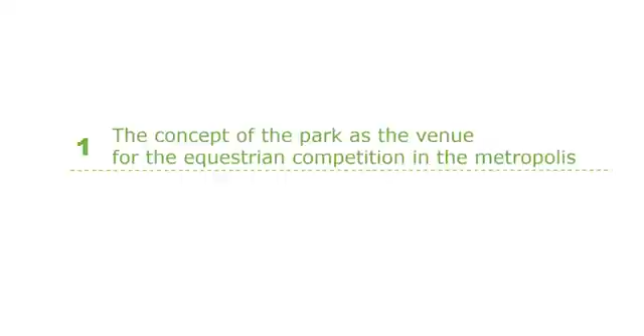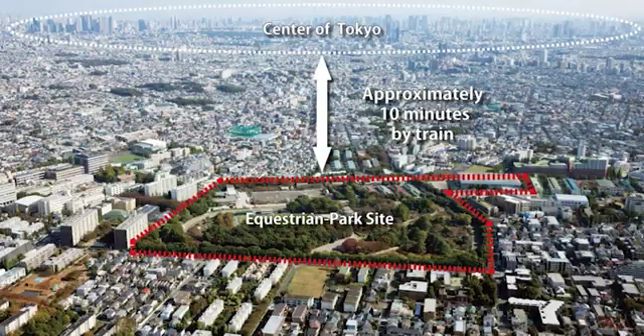JRA Equestrian Park for Tokyo 2020 is owned and managed by JRA. As you can see from the aerial shot, it's within a heavily residential area near the center of Tokyo. During the 1964 Tokyo Olympics, this site was used as an equestrian venue. At the time, this residential area was not so dense.

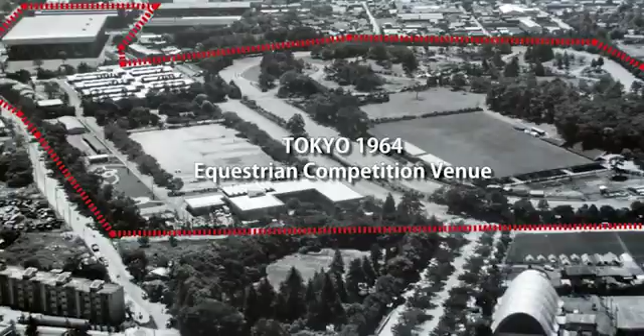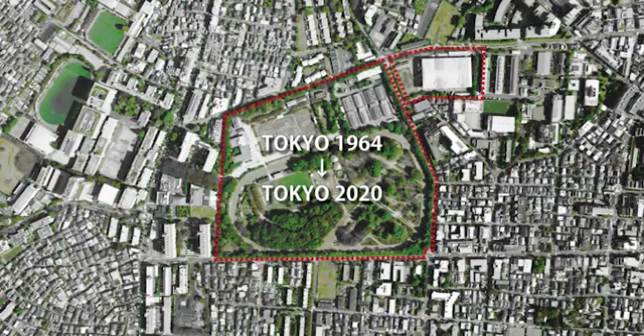This time again, JRA's Equestrian Park was chosen as one of the Olympic venues. But before the games, there were some issues to be resolved. First, all the facilities and equipment had to be renovated to meet the requirements of the FEI, International Federation for Equestrian Sports. They were too old to meet current laws and regulations for disaster prevention. As per FEI regulations, for the Olympic and Paralympic Games as a top world-class equestrian event, we found that the required total site, including stables, control center, and accommodations for grooms, needed to increase so that it would be 2.5 times bigger than the original.

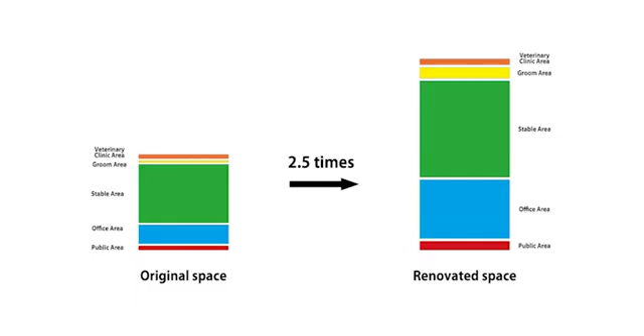15,000 people per day are expected, including spectators and volunteer staff. Also, the site is quite smaller than other equestrian venues at past Olympics. So efficient use of space is vital.

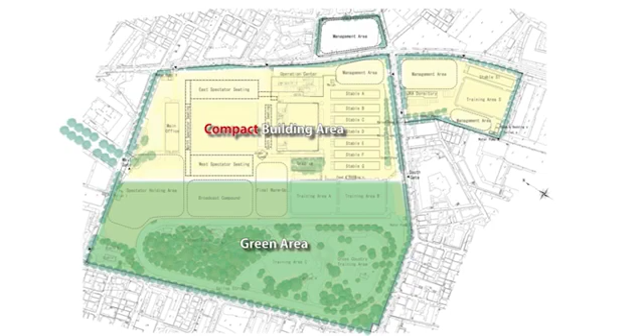Throughout these conditions, the idea of zoning was set for the entire site of this project. We have adopted a method that clearly separates the building area, which is as compact as possible to gather the buildings, from a greenery area, which has been developed while keeping the existing greenery. Here is the space for the building area, and you can see how the facilities are allocated.

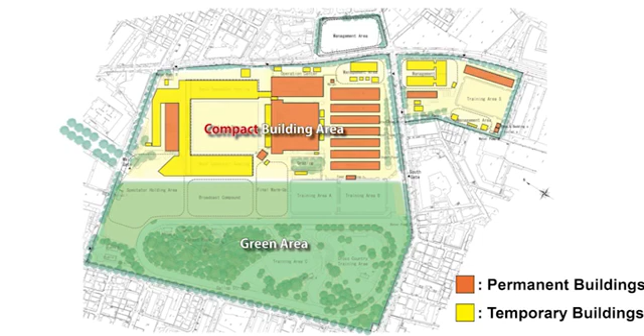In order to preserve the green environment that has existed since the 1964 Tokyo Olympics and construct the buildings compactly, we adopted the method of stacking various room functions 3-dimensionally, and the temporary stands.

Here is the main arena. As an example, the main arena had to contain seats for 10,000 people. Generally, a temporary viewing stand is built with a simple framework of single pipes like this. But in Japan, where earthquake countermeasures are strictly enforced, a viewing structure like that is not allowed.

Therefore, our viewing stands are made of steel frames. By taking advantage of this restriction, we made effective use of the lower part of the viewing stands to secure space and rooms for the spectators and the operational functions for this event.

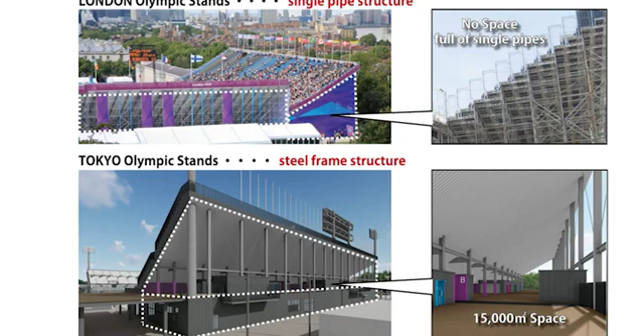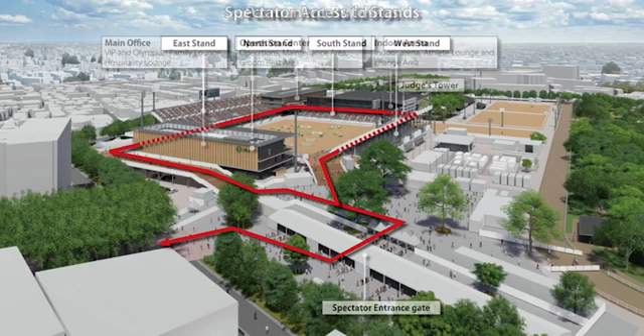Furthermore, during the event, we plan for spectators to move on the second floor, and the main arena will be surrounded by a temporary pedestrian deck. The deck connects to the temporary stand and permanent buildings, such as the main office, indoor arena, and operation center, with easy access. As a result, we succeeded in securing about 15,000 square meters with this two-layer concept.

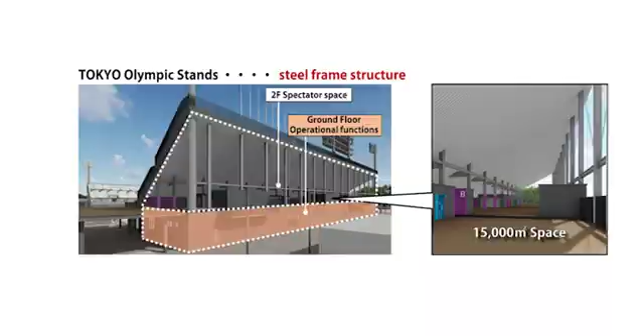From a security perspective, the venue became more manageable by dividing the zone into the first floor for operations and the second floor for spectators. The main office will have a VIP and family lounge for Olympians on the third floor, and a hospitality lounge for customers with high price tickets on the second floor.

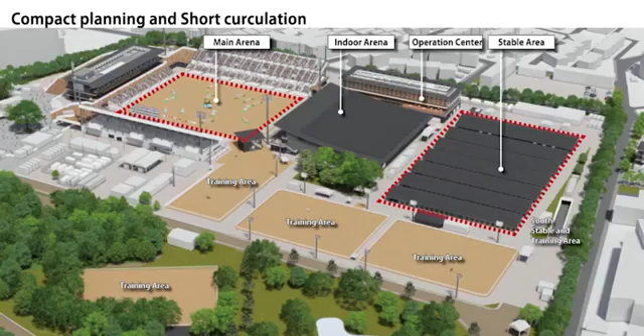The stables are right behind the indoor arena and give easy access to the main arena and all training areas. Each of the 7 buildings has 40 stalls in this area, and another building in the south area connects through the underpass, with a total of 320 stalls. The test event was held last August, with buildings arranged compactly, as shown here.

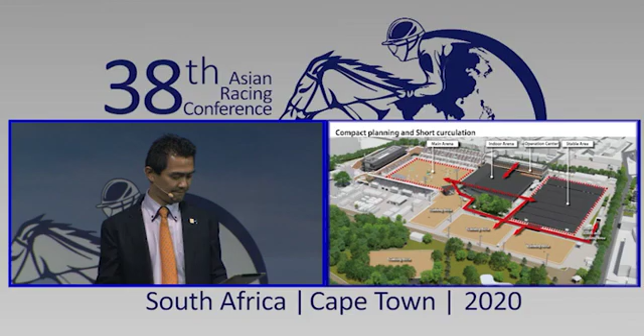Before the test event, there were some concerns about limited space. But it had the advantage that horses and people can move quickly, and management requires fewer staff. We feel that this can make up for the disadvantage for Tokyo 2020.

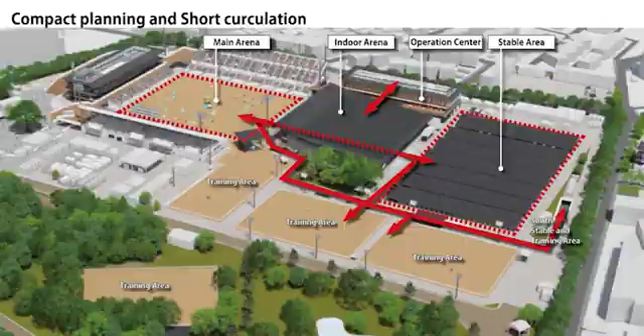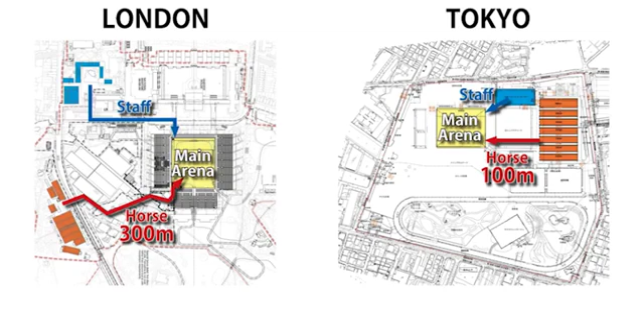Post-Tokyo 2020, the areas for temporary stands and broadcast compounds will be replaced with lawn and trees to regain their status as park facilities.

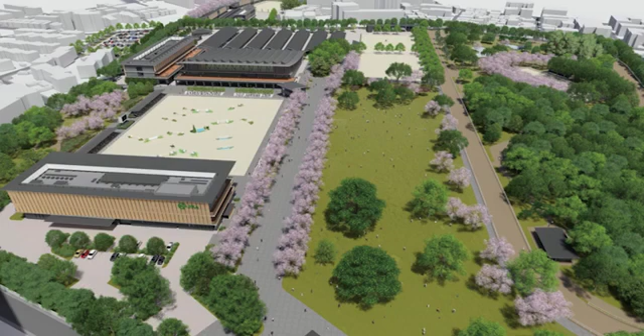This area and the cross-country practice area are designed to hold 3-star class eventing. Although the park is within the metropolis, it has been renovated to hold many equestrian competitions. The Equestrian Park for Tokyo 2020 will be used as an equestrian base and for Olympic and Paralympic legacy.

Speaking of compact venues, we'd like to thank the Hong Kong Jockey Club, which served as a great reference for us in planning our project. We saw great success with their equestrian competition in the Beijing 2008 Olympics. Thank you.

Now, let's move on to the sustainability and the universal design of the park. With the full renovation of the venue for the Paralympics, JRA established the following policies in pursuit of universal design.

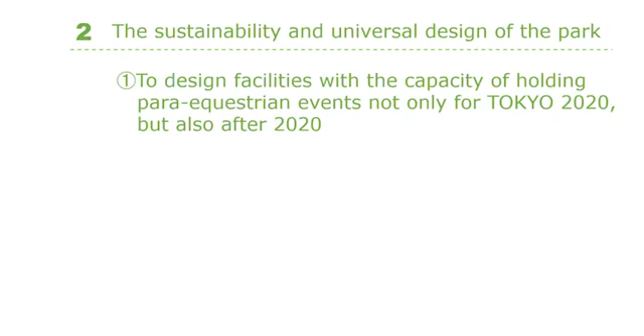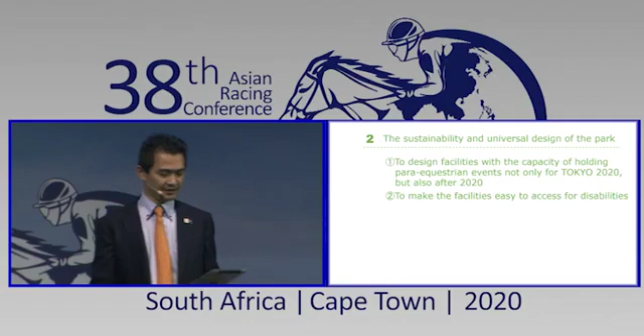First, to design facilities with the capacity of holding para-equestrian events, not only for Tokyo 2020, but for after 2020. Second, to make the facility easy access for disabled people. Third, to provide an environment more popular for kids and elderly. Fourth, to promote sustainable development with effective use of resources and energy-saving measures.

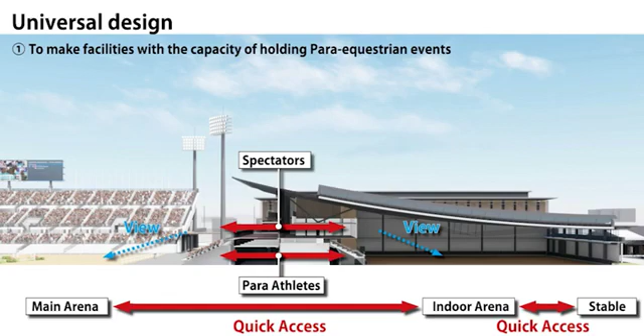For the purpose of 1 and 2, in addition to creating an effective facility layout, the main arena and the indoor arena are adjacent to each other, so that we can use both for equestrian competition and use the venue even in poor weather conditions. Although the maximum difference in elevation is 6 meters on site, which can also be used for cross-country competition, we are thoroughly pursuing barrier-free facilities that allow smooth movement without any steps or steep slopes in this project.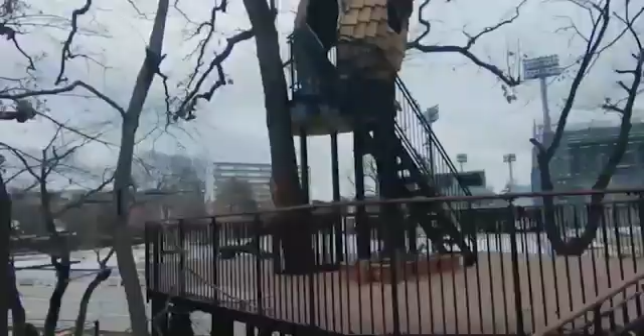We built an aerial forest trail called Forest Pass. This goes up to 3 meters above ground and is wheelchair accessible. This is a place where people can touch tall trees and enjoy forest bathing, and catch a bird's eye view of horses running through the cross-country course.

At the end of the Forest Pass, there is an observatory that overlooks the entire park, as well as a small tree house for children.

Third, we have many approaches to many places where everyone can have a good time. We worked on making it accessible for all people, installing a sufficient number of toilets for wheelchairs, a service dog restroom, nursing rooms, and a restroom only for kids. After Tokyo 2020, playground equipment for children will be installed.

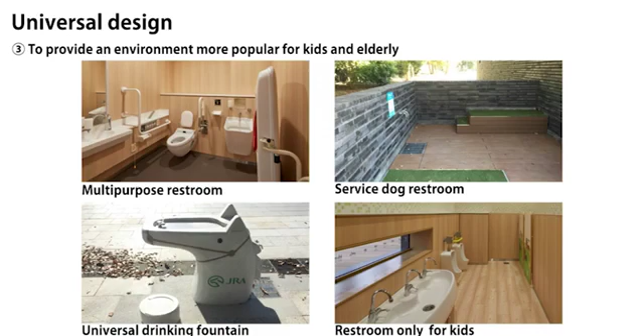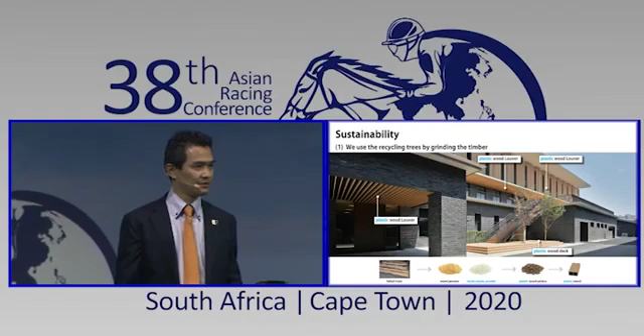Here are the sustainability details. First, we are recycling trees by grinding the timber into wood powder, blending it with resin to build permanent and durable wood decks. Also, we have utilized the trees for exterior and interior furniture, playground equipment, and interior design.

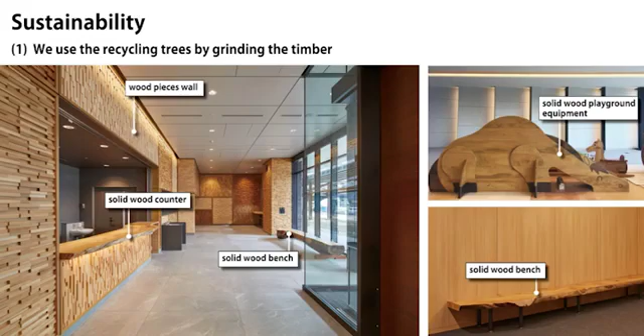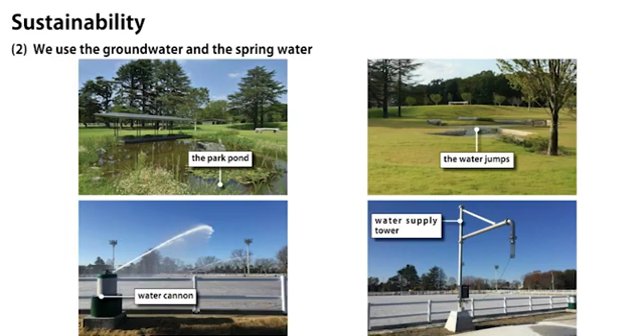Second, groundwater and spring water are used for the park pond, which provides scenic landscape, and for water jumps in the cross-country competition, as well as for daily management of tracks and plants.

Third, the soil generated during construction has not been disposed of. We have used it for the undulation in the cross-country area and for flat leveling on the site. This also enhances the attractiveness of the venue.

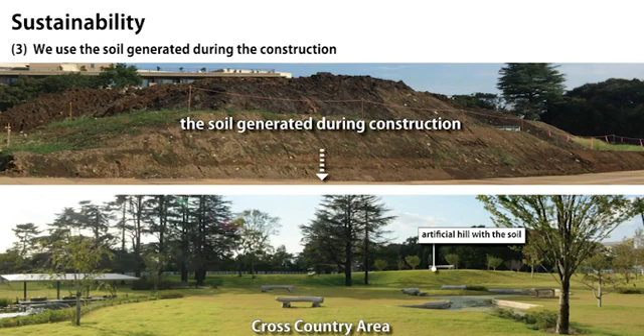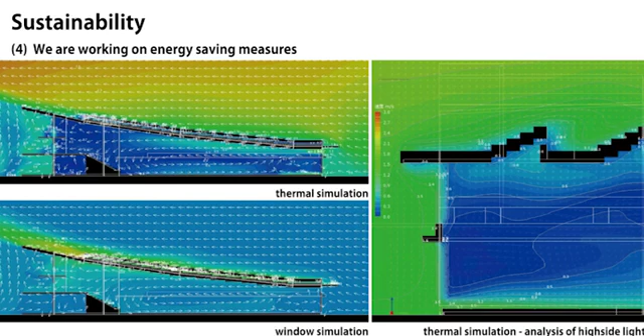As listed in point 4, we are working on energy-saving measures, including natural lighting and ventilation in the indoor arena and the stable, solar control by large roofs and eaves, LED lighting, and automatic power devices.

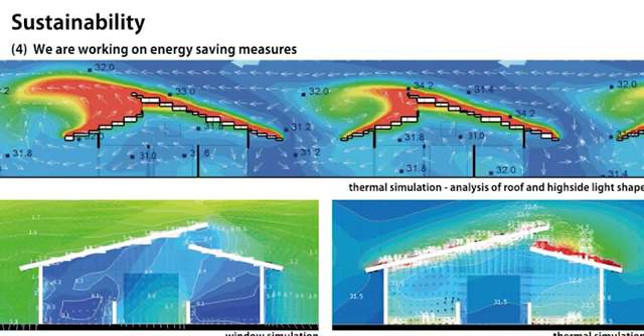And now, I'd like to focus on the Great East Japan earthquake influence on design. JRA Equestrian Park, within the metropolis, is recognized as a spacious facility located on prime land in Tokyo Center.

It has been designated as a temporary shelter in case of disasters and can accommodate approximately 105,000 residents. In the event of disasters, such as heavy rain, fire, and earthquakes, it's very important to ensure building safety, especially after a big earthquake.

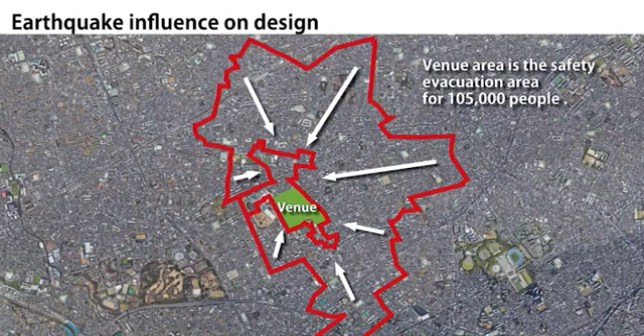Therefore, in this renovation, we have increased the earthquake resistance for all buildings to higher than the latest laws and regulations. Furthermore, the park is being equipped with wells and manhole emergency toilets for evacuees.

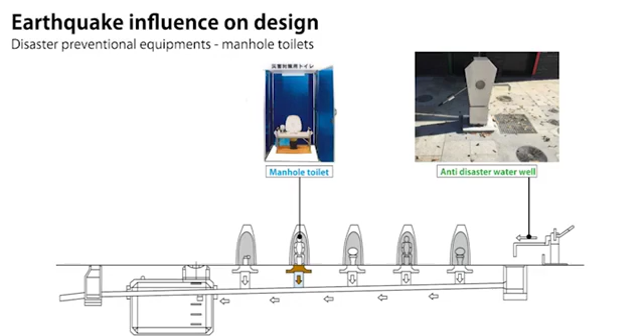Fire prevention water tanks have been installed in various places in the park. In addition, we are working on measures to contain heavy downpours exceeding 100 millimeters per hour, which has happened quite a lot in recent years.

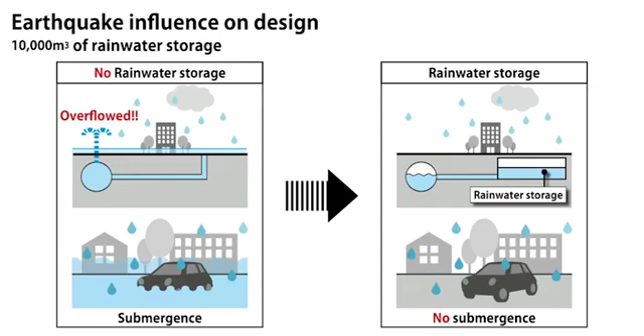To prevent flood damage in the downstream area, this site's rainwater will not be drained directly. Instead, it will be stored in 7 tanks, totaling about 10,000 cubic meters of water storage.

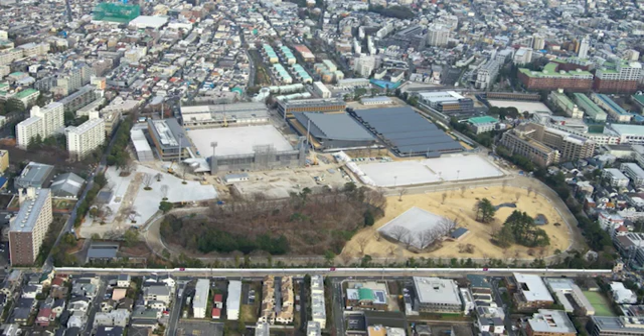This is an aerial shot taken last month. Construction of temporary buildings will be completed by April. So, that is all for the design approach of this project.

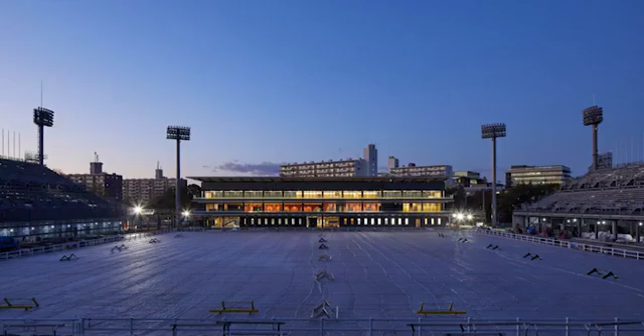That is all for my presentation. Thank you very much for your time and attention. We are looking forward to your visit to the Tokyo 2020 equestrian games.